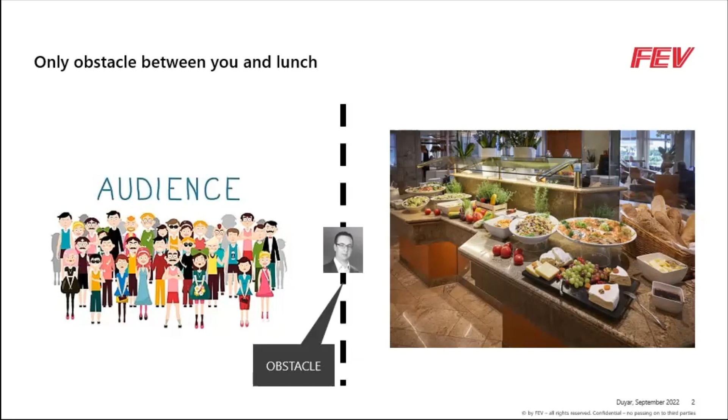So when the agenda of the conference was initially introduced, I was the last presenter before the lunch. Thank you to the PowerSys marketing team. Now I'm not the only obstacle before lunch, there is one more. So Samba-san will share being an obstacle with me before the lunch, but no worries. I'll try to make it quick and painless.

Do you know how many cars are there in the world today? Any guess? It's a little bit more than that. It is almost 1.5 billion cars running on the roads today. And I have good news for electrical engineers, for JSOL, for PowerSys. That will come in a minute. Today, only 1% of those cars are electric, but it will increase. If you look at worldwide sales last year, it was 66.7 million, and 10% of those cars were battery electric vehicles.

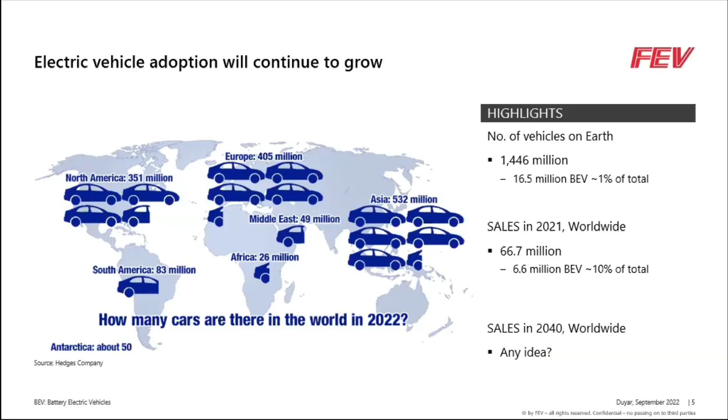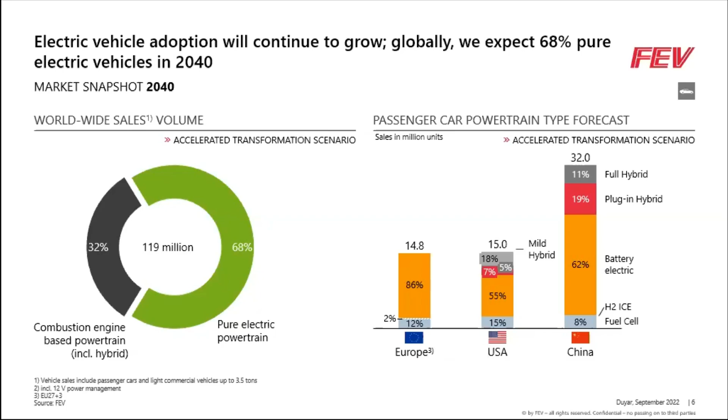And any guess what will be the worldwide sales in 2040? There will be... right. But what we project as FEV, there will be 119 million cars sold in 2040. And 68% of them will be pure electric. So good news for PowerSys, good news for JSOL. There will be a lot of opportunities for you. So I said this was our projection.

So who we are, who is FEV? We provide future mobility solutions for our partners, our customers all around the world. We are headquartered in Aachen, Germany. That's the place where I am based. But we have more than 40 offices in 5 continents distributed around the globe. And we have more than 7,000 employees, most of them experienced engineers. And what we do, we develop mobility technologies, mobility solutions. From a blank sheet, we develop vehicles, powertrain and electrification, intelligent mobility, energy, software and testing solutions, and we do consulting.

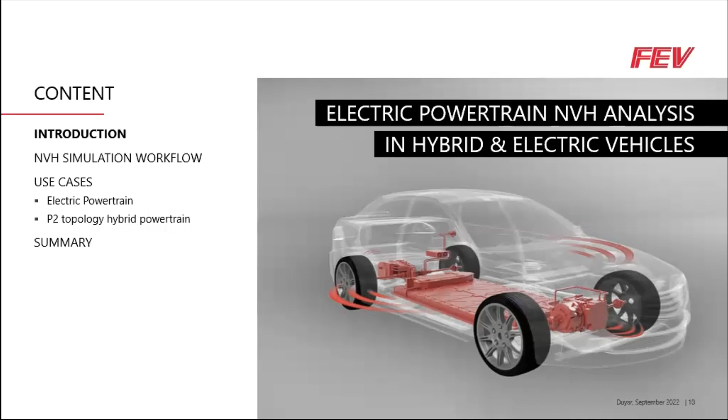So after this bit of introduction, let me come to the point of today's topic. A little bit further introduction. There are major key differences between conventional internal combustion engine vehicles and battery electric vehicles. For IC engine vehicles, most of the noise is coming from the powertrain, then road, wind, and auxiliaries. Whereas for battery electric vehicles, the noise is dominated by road and wind, then powertrain and auxiliaries.

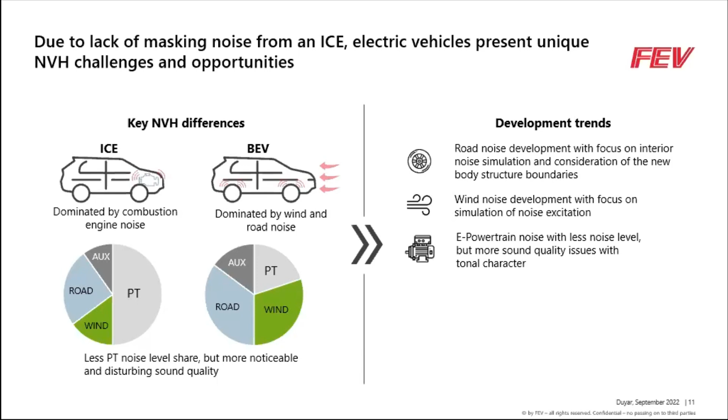And there are a number of different development fields. Road noise is being reduced, wind noise development as well. Then electric powertrain noise is less than the internal combustion engine, but it's a little bit more annoying with its tonal character. Then active sound design, as well as the contradictory situation between weight reduction and NVH issues. But among all these, what we are focusing on today is electric powertrain noise.

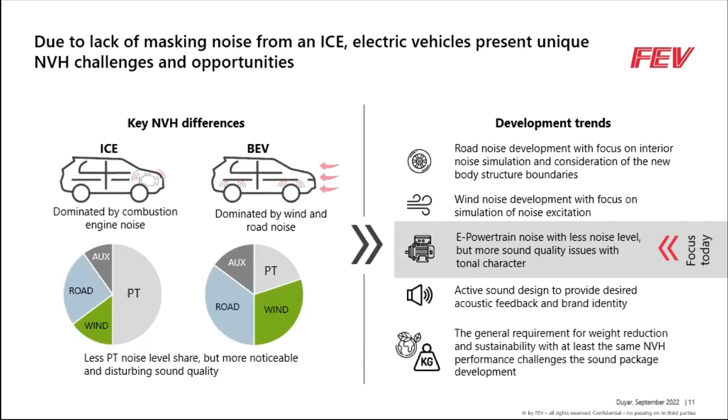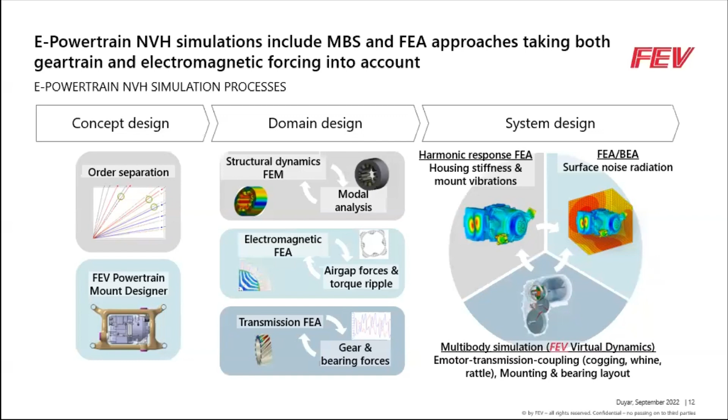And for electric powertrain NVH simulation, we do different analyses in different phases of the development: concept design, domain design, and then system design. In system design, there are different methods that we use, FEA, BEA, and also multi-body dynamics. That's what I am going to focus on today. Virtual dynamics is our commercial software for mechanical dynamic analysis.

This system level development includes flexible housing and stator, gear stiffness calculation for rattle and whine problems from the gearbox, dyno-controlled speeds, flexible drive shafts, and electric powertrain mount stiffness and loss coming from measurements. And we calculate individual tooth forces, which are more interesting for you, I believe. We use analytical or FE model coupling between interacting bodies. We have either flexible or rigid components like shafts and rotors. And then we have different fidelity level bearing models.

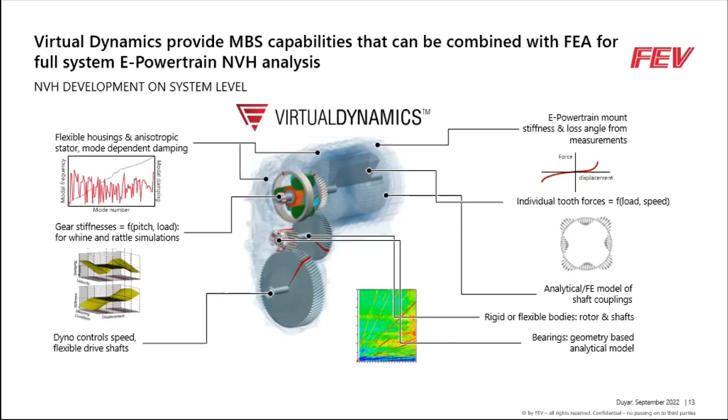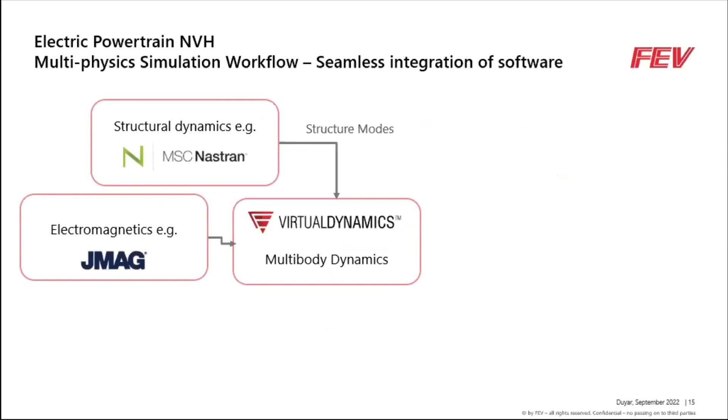So if you look at the workflow of how we do this, we have a seamless integration of different software, orchestrated by virtual dynamics for mechanical dynamics. Then we take into account structural dynamics from the FE models to calculate the vibrations of the surface of the powertrain. Then electromagnetic forces come in with JMAG. And with the help of all these software, we also calculate the acoustic radiation using Actran.

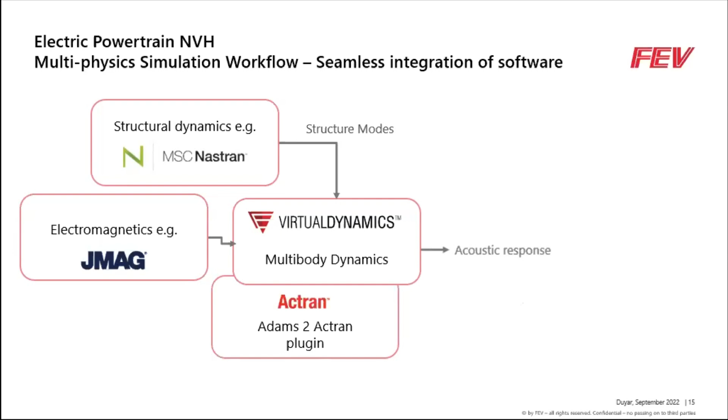Or if we are not acoustic experts, we provide a seamless integration to Actran. The Actran solver runs behind the scenes. You don't need to be an acoustic expert. All the necessary important results are written, including audible wave files with which you can subjectively assess the sound quality.

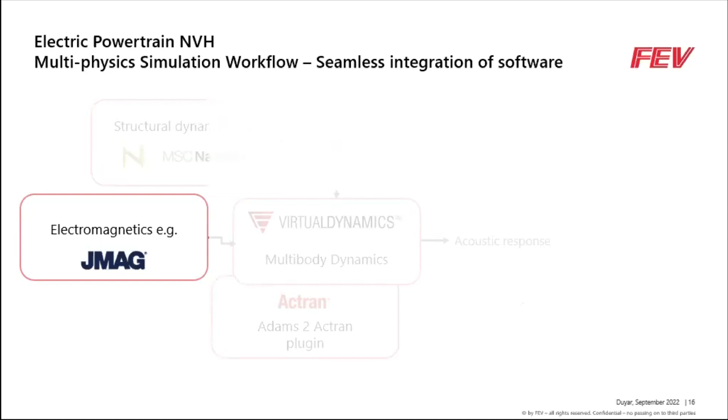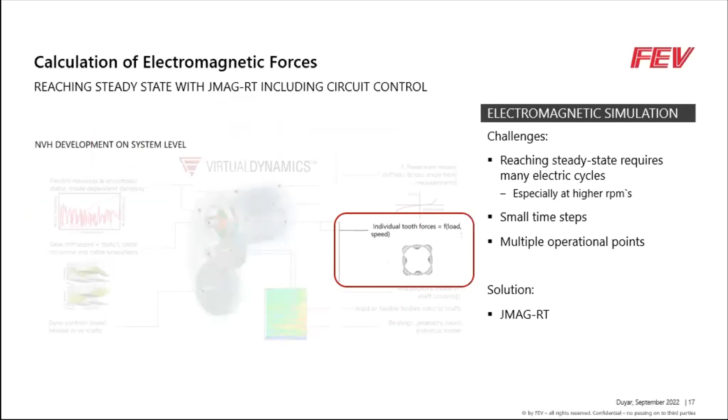So what is done with JMAG? We calculate the individual tooth forces at the stator. And the challenges are reaching the steady state, which requires many electric cycles, especially at high RPMs. This problem also requires small time steps, and we are talking about multiple operating points, different loads and different rotational speed conditions. So the solution is JMAG RT, which was presented earlier today.

So probably I am the least knowledgeable guy in this room about JMAG RT. You probably all know this.

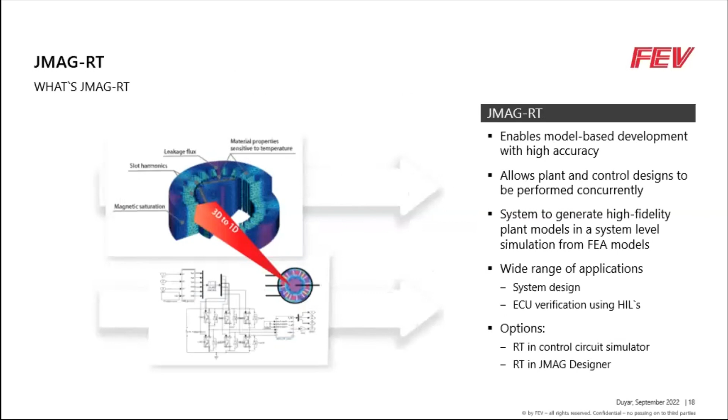It enables model-based development with high accuracy and allows plant and control designs to be performed concurrently. It has a system to generate high fidelity plant models at a system level, and there is a wide range of applications. For this particular case, there are two options. One is RT in the control circuit model. The other one is in JMAG Designer.

So in the control circuit, the starting point is an FE model with sinusoidal current that creates a plant model and lookup tables where we can select the operating point. Then in the control circuit, there is the RT model that creates the current waveform with high harmonics, which speeds up the simulation a lot. Once we reach the steady state, we do the FE model simulation with high harmonics, and we calculate the electromagnetic forces.

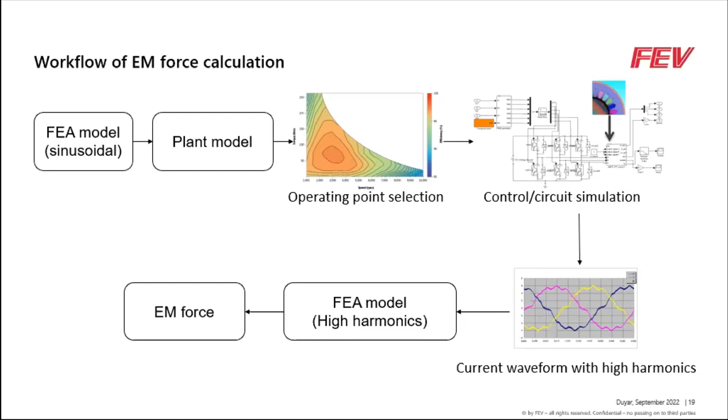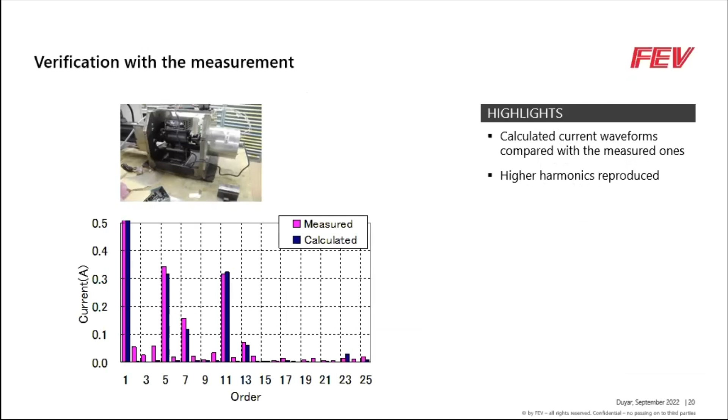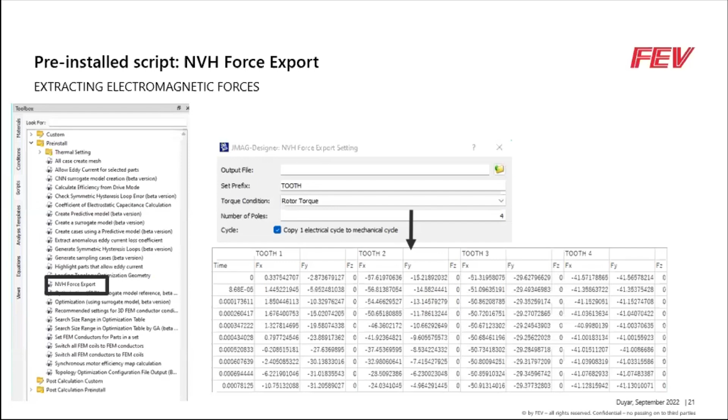In JMAG, there is a pre-installed script, so-called NVH force export. At each stator tooth, the radial and tangential forces are written in a CSV file, and we import it from the CSV file into the virtual dynamics environment.

So use cases: electric powertrain. This is a 2-speed electric powertrain. Depending on the power flow between these two different planetary sets, the speed is decided. Here are the torque and electromagnetic forces coming from JMAG that feed into virtual dynamics for mechanical dynamics simulation. And with the participation factor, we calculate the radiated noise.

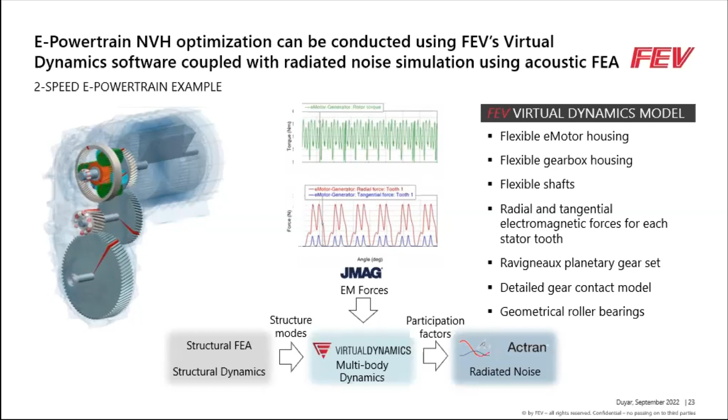In this particular model, we have flexible electric motor housing, flexible gearbox housing, flexible shafts, radial and tangential forces at each stator tooth, a planetary gear set, a detailed gear contact model with gear stiffnesses calculated on the fly, and higher fidelity roller bearings.

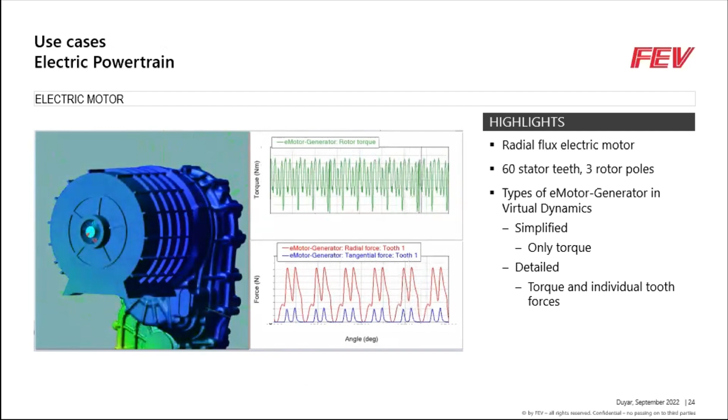This is the electric motor rotor torque time domain simulation, and the radial and tangential forces. You can see the vibrations on the housing that will eventually create noise. These plots are the forces between different gear sets. We run a speed ramp-up simulation from 3,500 RPM to 7,500 RPM in 2 seconds. We also see a sign change on the gear pair forces, which means there is a potential for rattling noise.

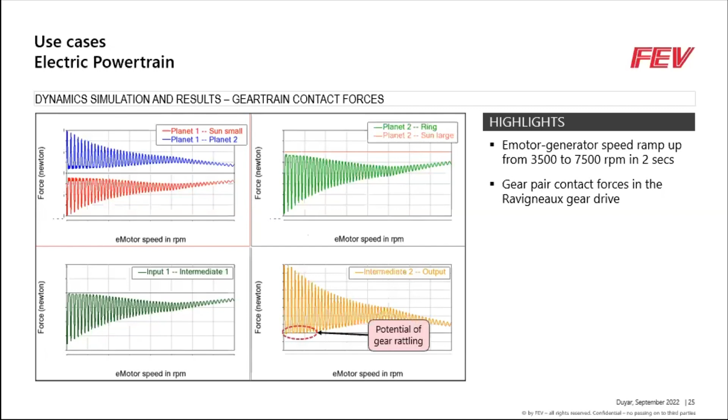In the ISO standard, there are defined microphone locations where we predict the acoustic radiation. On one of the microphones, we see this Campbell diagram. Prominent orders are visible in the lower frequency band, and there is also a higher group of orders in the relatively higher frequency band.

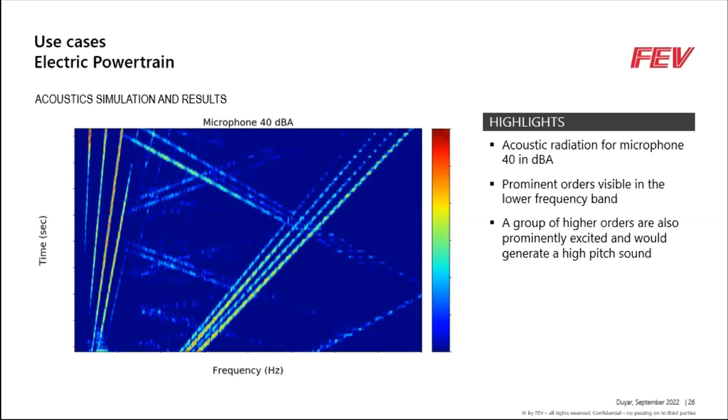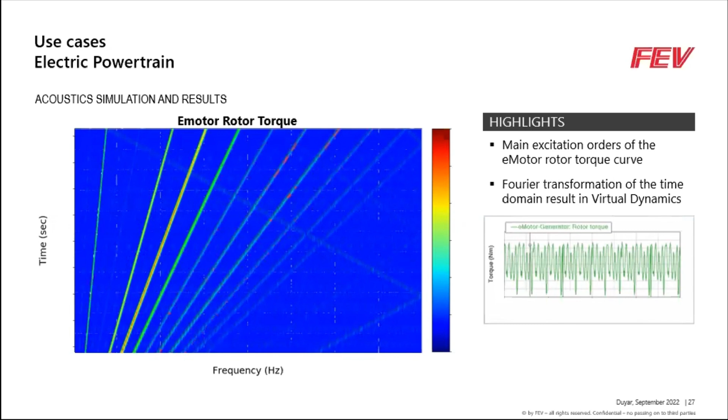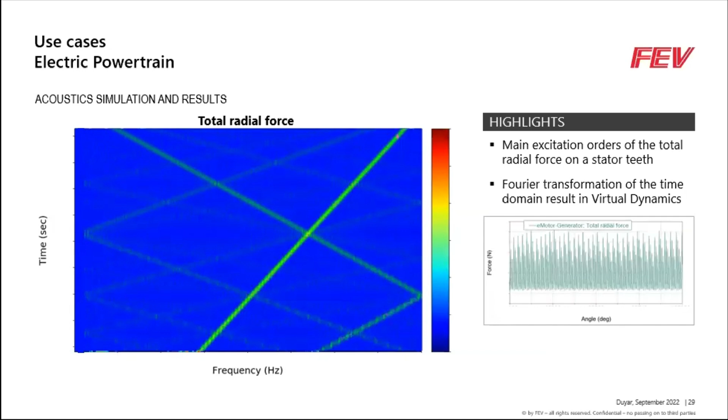So in summary, we try to understand where these orders are coming from: electric motor torque, single tooth radial force, and total radial force. And there is an indication of minor gear rattle at this frequency band here.

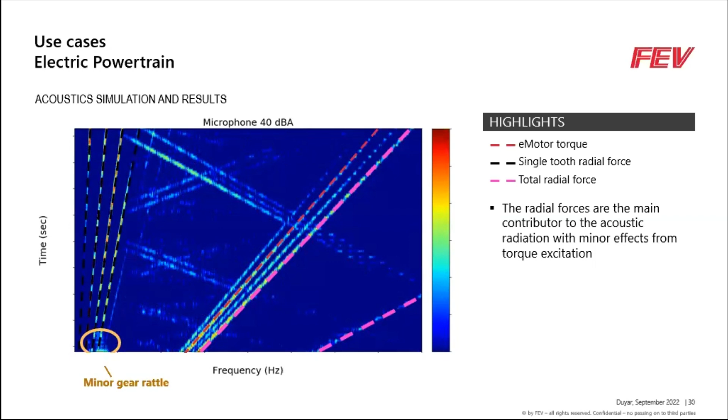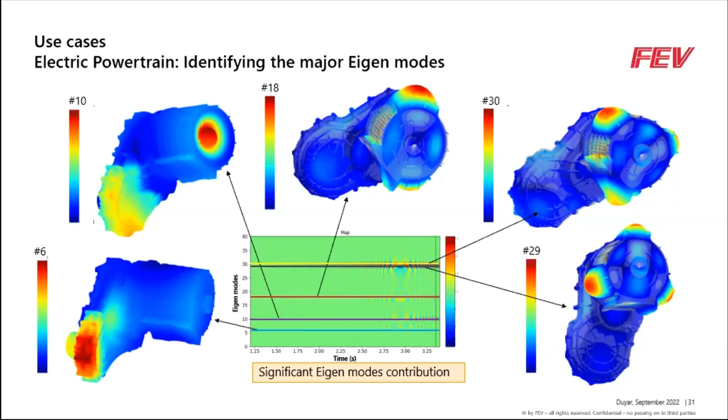We can also identify the major eigenmodes that are contributing to the noise, eigenmode 6 up until 30. Some of them are listed here, the major ones, basically coming from the electric motor housing. This plot shows one of the microphones' element contribution to the noise. And we can also hear the noise.

We could hear. Can anybody help me to hear this noise? I think it's muted.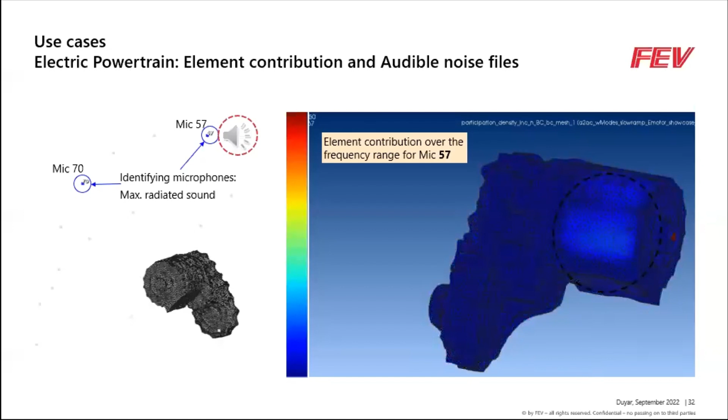Yeah, that's the typical tonal character of an electric powertrain. So by looking at the automatically generated Campbell diagrams, we can assess quantitatively the NVH behavior of the electric powertrain, but equally, we can also assess it subjectively, like listening and trying to qualify whether this sound is good or bad, or take some other measures.

I have another example, which is a P2 topology hybrid powertrain. So depending on where the electric motor is on the vehicle along the driveline, the hybrid topologies are defined from P0 to P4. So this is an inline four-cylinder internal combustion engine mounted through a dual mass flywheel to a transmission, manual transmission, and then there is an electric motor mounted to the manual transmission.

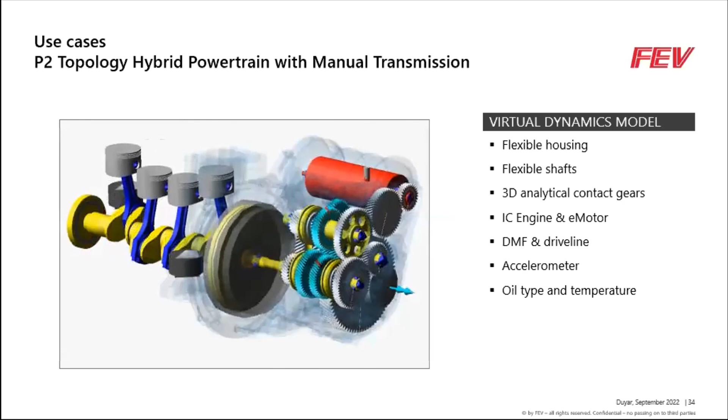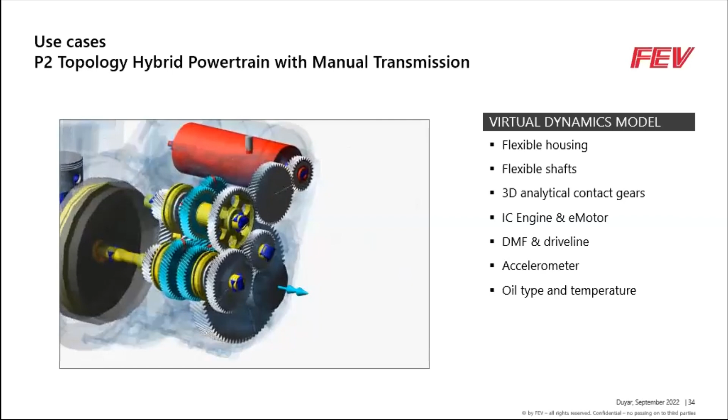We have an accelerometer on the transmission casing. We have flexible bodies so that we can predict the vibration of the casing. And at this accelerometer location, we predict the acceleration of this powertrain. And equally, on the test bench, we measure the acceleration by using an accelerometer on the bench. And also we have a microphone with which we measure the radiated noise.

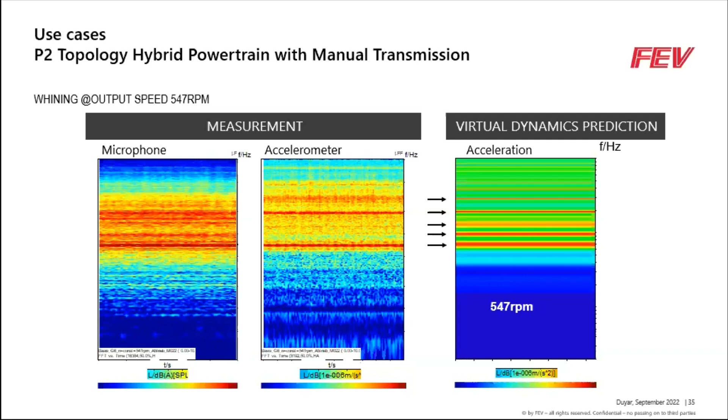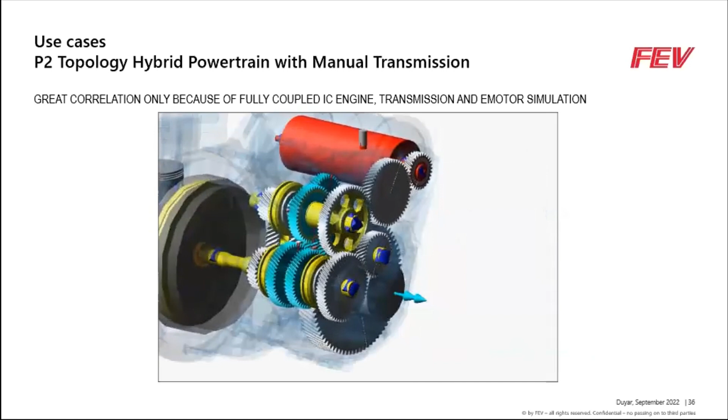This is a microphone measurement, accelerometer measurement, and this is the virtual accelerometer result out of Virtual Dynamics prediction in this workflow. So if we compare the measurement and prediction, we managed to capture the major orders of the frequencies as well as the amplitude of the accelerations. It's pretty good correlation. And this is only possible because the coupled simulation of engine, transmission, and electric motor is done with Virtual Dynamics.

So in summary, I tried to show a workflow in which you can predict the NVH behavior of an electric powertrain. You don't need to be an acoustic expert. All the relevant important plots and sound files are written automatically.

I hope I kept my word and finished fast and painless. It was painless and very interesting. Thank you very much, Mustafa. And I think you will have some questions or comments. Yeah, thank you very much for the nice presentation.

A question about the magnetic part. You used lumped forces on the stator teeth, right? Correct, yeah. And have you compared it with the nodal force on the whole stator to see the difference in the acceleration result? So what we do is we calculate the lumped force, as you said, but if you have some FEA background, we use an RBE3 element on the stator tooth to distribute that force to the entire stator tooth. But we haven't tried just the distributed force coming out of electromagnetic analysis, no. Okay, thank you.